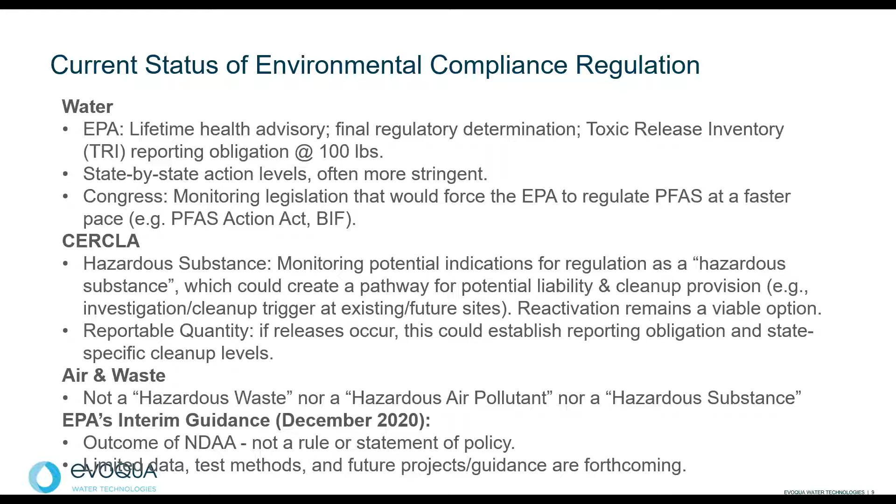And one of the things I wanted to mention is, if you saw the news recently with the Biden administration, on October 18th, the EPA announced its PFAS Strategic Roadmap. It's really the EPA's commitment to action from 2021 to 2024. And it provides the agency a plan for regulating PFAS over the next 3 years.

This roadmap is the product of the EPA's Council on PFAS and includes a comprehensive program combined with expected timetables. I just thought I'd hit a couple highlights for everybody. And if you weren't aware of it and you want to be aware of it, the full report is available at www.epa.gov/PFAS. So quickly, a couple of the actions: establish a national primary drinking water regulation for PFOA and PFOS, and proposed rule is 2022 with a final rule of 2023.

They hope to propose to designate certain PFAS as CERCLA hazardous substances, most likely proposed in spring of 2022, final rule summer of 2023. And the list goes on. So take a look at that website again. It's www.epa.gov/PFAS to find out the latest in the progress that EPA is making on that.

So how does PFAS enter the environment and how do we get exposed to it? Contaminants enter the environment through various sources and eventually make their way into the soils, the groundwater, drinking water, and eventually humans. This picture really tells a story. It all starts with a source. Some examples might be chemical manufacturers or producers, commercial applications, a landfill, your wastewater effluent from a treatment plant, and then even firefighting training areas or firefighting foam application that has been applied.

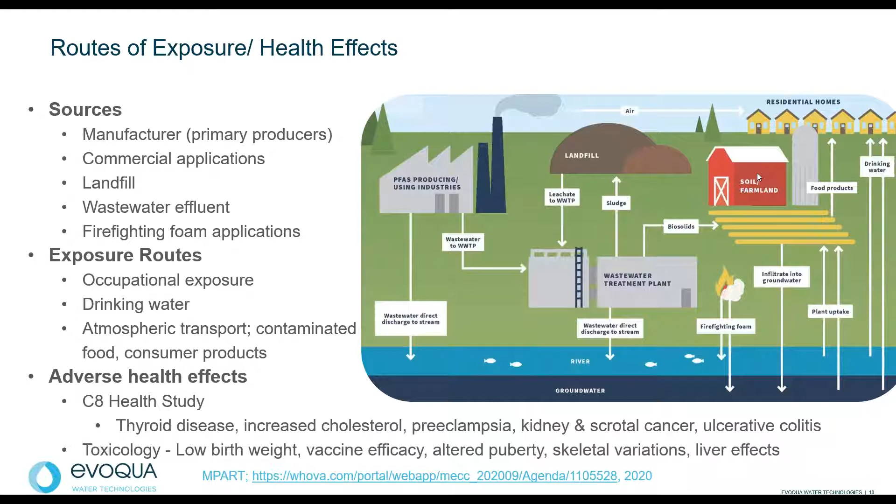And with that, I'll pass it over to John. We'll start getting into solutions and the case studies. Thank you, Jeff. This is John Lombardo. Thank you for your attention today. I'll be covering solutions and case studies.

So, a little click happy, my apologies.

So for PFAS removal solutions, there's really 2 methods that are currently the most prolific in the business: adsorption and separation. So adsorption is an attraction process or an exchange process. And basically we call it a capture technology. It's basically something that captures the PFAS and holds onto it and removes it from the stream. And then separation is exactly what it says. It actually separates it. In this case, it's a membrane.

So the 3 most popular treatment solutions currently in the market, at least for municipal drinking water and some of the others, are granular activated carbon, which has been named the best available technology by EPA for organic contaminant removal. It does have other adsorbent properties for other organics as well. And it's a pretty tried and true technology that's been around for a long time. It requires minimal maintenance and it's very effective.

The next is single pass ion exchange. It has a lower empty bed contact time than granular activated carbon, so it can usually go at a higher flow rate. Therefore, it takes up a smaller footprint because you can get away with smaller vessels. It does not have a chemical or liquid waste from it. The spent resin can be incinerated, and it again has minimal maintenance requirements.

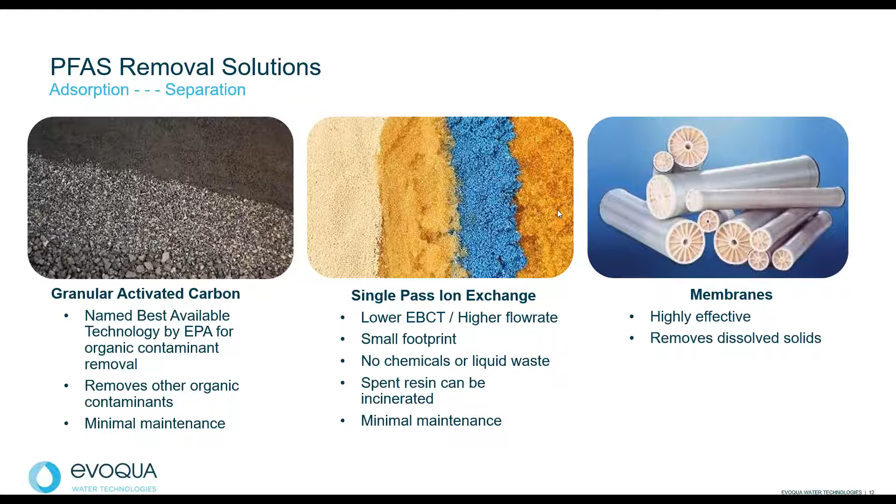The last is membrane, so RO or NF. They're very effective. They remove dissolved solids, but you do have to deal with a concentrated waste stream, somewhere in the range of, I'll say 10 to maybe 25% of the influent stream. But it is effective at separating the PFAS as well as the other contaminants from your influent stream.

So how does granular activated carbon, or why does it work? Granular activated carbon, or GAC, is a highly porous media that has a tremendous surface area that is used for contaminant adsorption. All carbon is not created equal. It all depends on the feedstock. It all depends on how it's activated or if there's any special treatment. The performance really is determined by the porosity and the surface chemistry, which once again is a function of the base material as well as the activation and treatment process.

In Evoqua's case, we do a pretty thorough job of matching the application or the user with the best performing carbon for their specific application. So over on the right, you can see a diagram that shows different pores within the carbon. There are macropores, which are the largest pores. These are basically the largest interstitial spaces inside the carbon. There are mesopores, those are medium pores or mid pores, and then there are micropores, and those are the smallest pores. And the micropores are where the adsorption actually finally takes place.

So if you look in the diagram there, you can see little specks and things going in and migrating their way down to the micropores. So the way that we like to look at it is the micropore is like a parking lot, and the mesopores are the highways that get you there, right? So it's all about balancing highways and parking spaces, right?

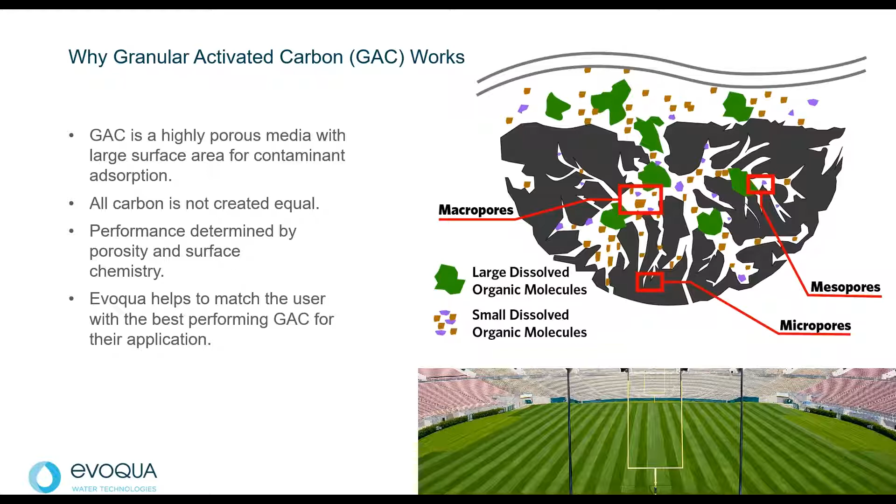So how does ion exchange work, and why does ion exchange work? Well, ion exchange is based on the principle of exchanging a harmless ion for the contaminant. So if you can see in the diagram on the right, the green contaminants are exchanged with the yellow chloride ions, and the green contaminants are stuck on the ion exchange resin and are therefore exchanged for the chloride ions that go back.

So it does take a small footprint because it does have a much smaller empty bed contact time, or a shorter empty bed contact time than granular activated carbon, typically in the range of 2 to 3 minutes versus 10 minutes or so for granular activated carbon. The life cycle costs are a little bit easier to predict because there's less interferences, and the spent resin can be incinerated.

For carbon, just kind of backing up a little bit, where carbon is really an omni-absorbent on organics, it will absorb other things in there. So other organics, naturally occurring NOM, background TOC, other things that are in there. With ion exchange, it does compete with other ions, things like chloride, sulfates, other things that are naturally occurring in the water. So looking at which one is the best fit really depends upon your influent water as well as your effluent guidelines and any other requirements in there.

So it takes a very holistic approach, or it should take a very holistic approach to look at the front end to the back end. Shouldn't be a cookie cutter approach. It really should be a specific approach and a tailored approach, if you will, to solving the PFAS equation.

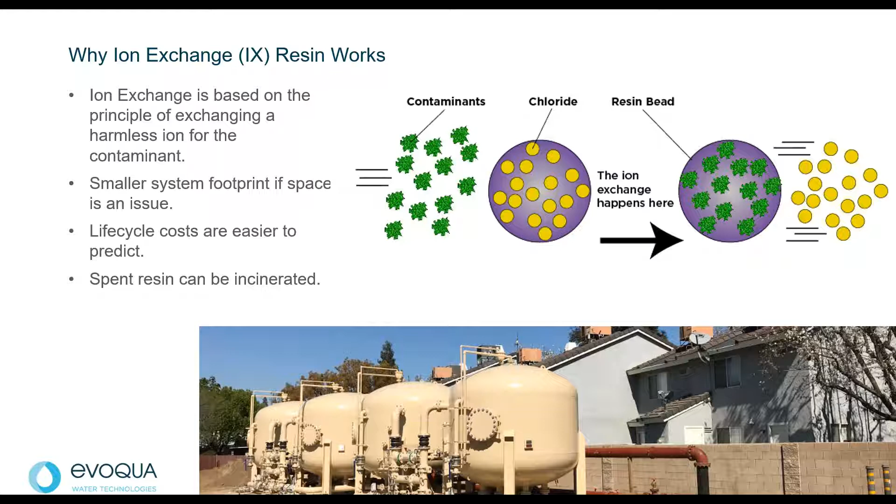The differences really between the two are the pilot scale, or the pilot test, is run on a slipstream of the influent contaminant. It takes a lot longer. Usually it's anywhere from 6, 9 to 12 months to be able to run a full pilot versus an RSSCT, which can be run in a fraction of the time, typically 2 to 4, maybe 6 weeks, depending upon the longevity and the contaminants and all the other things in there.

Pilot testing is usually recommended for surface waters or difficult waters, because it takes into account seasonality and other things. If you have groundwater that's pretty static, if you will, an RSSCT should give you a good picture of what you have, because the RSSCT uses a snapshot, a single grab sample, or even if you've done a composite over some time, it's basically a one-time sample of the water that you're running through on a scale. And that's what we use to then basically scale up or provide information on throughputs, capacities, and performance of the system.

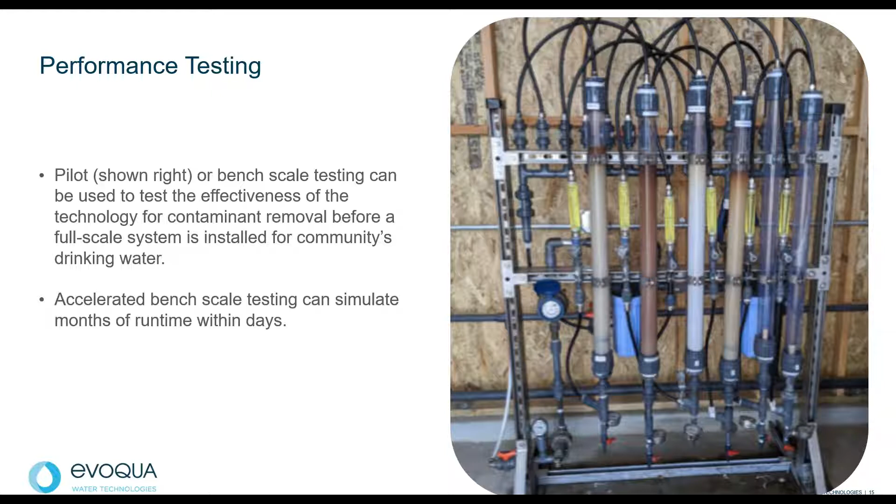So if there's a down, like something happens with your wastewater treatment or heavy rains or something else that needs to be put in, there are opportunities to bring in mobile or temporary systems.

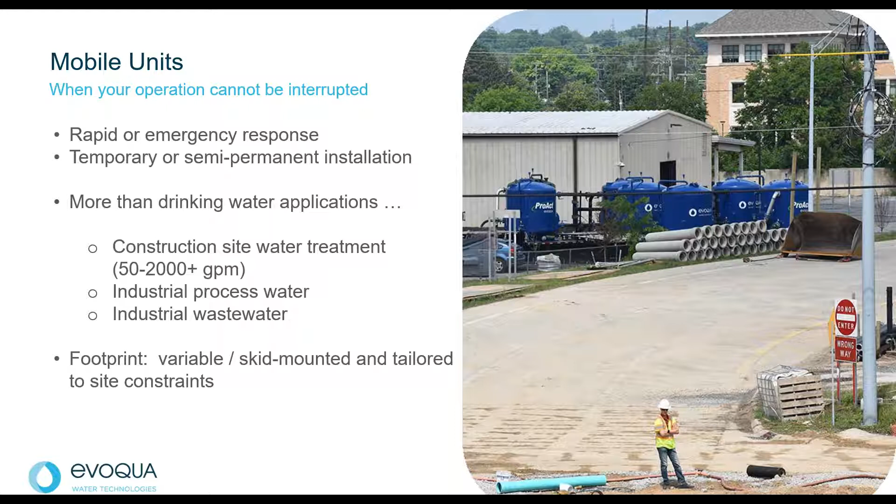So now I'm going to cover a couple of case studies. So the first is water treatment at a construction site for contaminant removal. This also happens to be another site in Michigan where they were doing development in the West Michigan area, and they were under an edict because, as you know, particularly in the north, there's certain times of construction before the ground freezes, so you have to be able to hit certain milestones to make sure you've got footings and diggings and other things done to be able to proceed with construction.

In this case, there was a very high water table that required a lot of treatment, and there wasn't much room, so a tight footprint was needed. There was PFAS at the site, which was higher than had been accepted, so it was not able to be discharged back into the POTW. So we brought in some mobile units and some frac tanks and other things, as you can see in the picture, to store and contain and treat the construction dewatering and make sure that it was PFAS compliant for discharge. The treatment goal was met throughout the project, and the project was completed in, I believe, about 6 to 8 weeks' time.

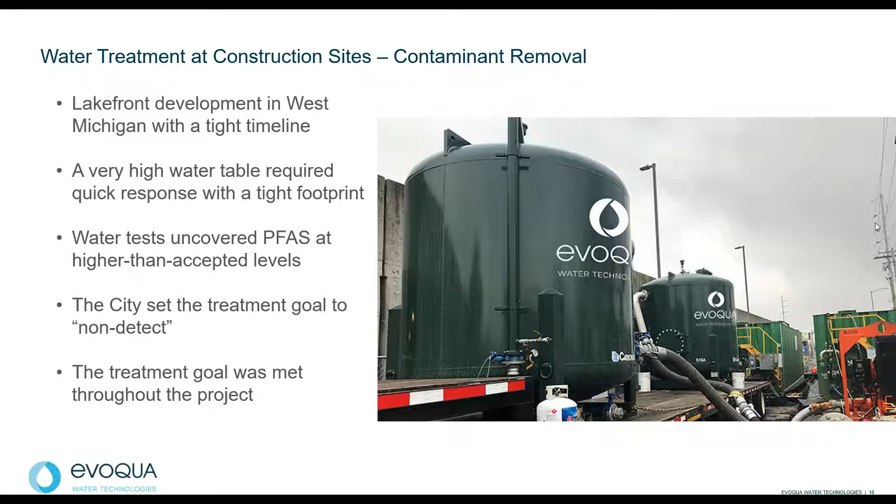So this is another one, another construction site. And this is more of a downtown or an urban setting. The solutions were tapped directly off the wellhead, but they were trying to treat for not just PFAS, but arsenic, mercury, and other contaminants that were in the water that had to be treated prior to discharge. So again, units were brought in both as a combination on trailers and on the ground, and the water was treated and the cleaned effluent was discharged into a municipal sewer.

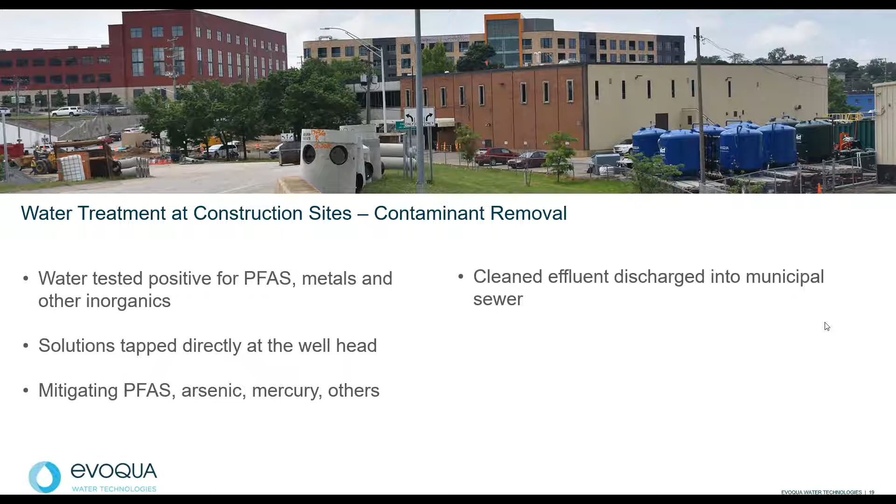Another one, which isn't PFAS, maybe not an emerging contaminant, was an emergency solution installed to mitigate seasonal taste and odor issues at a site in Colorado, where they had MIB and geosmin in the water. The municipality was planning on designing a new facility, but wouldn't be able to get it implemented for a couple of years with permitting and construction. But they needed a solution to treat for the seasonal water when tourists were coming in.

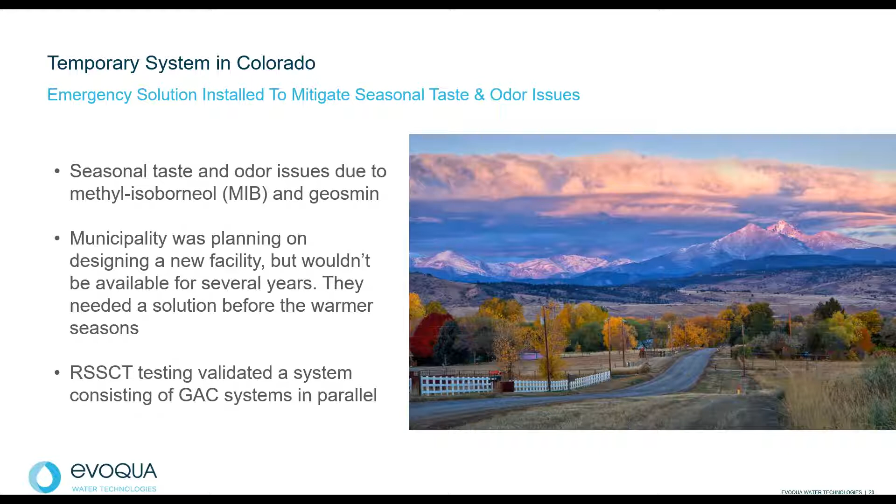So we did some RSSCT testing to validate the offering, and it was a GAC system, operated multiple vessels in parallel, and had a very successful treatment system that lasted for the summer and was taken offline in the fall so that the vessels could be stored and they could put it back online for next summer.

Another case study is at Kennebunk, Kennebunkport and Wells Water District in Maine. This is a very proactive district. They tested many carbon systems and many carbon products. Evoqua was involved in the pilot testing to help support them, and they had decided that they wanted carbon, so we helped them determine which carbon was the best one to perform given their local water chemistry.

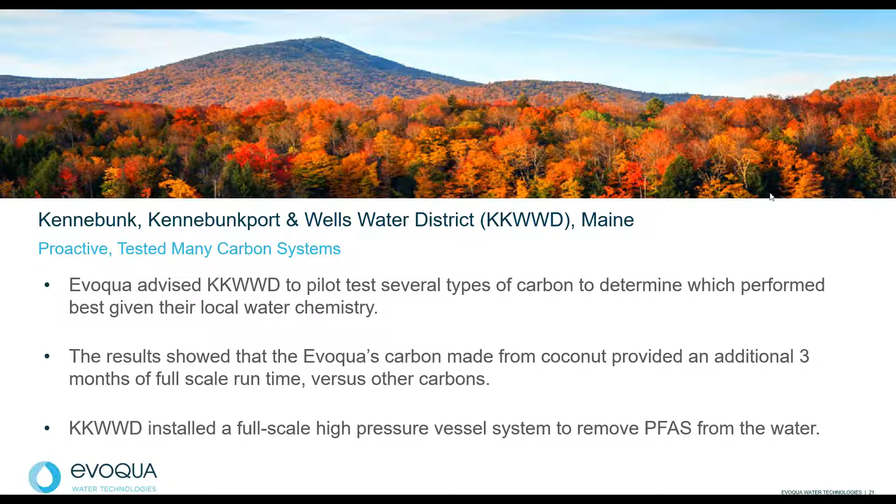In this case, the results showed that carbon made from coconut provided an additional 3 months of full-scale runtime versus other carbons. The following slide will show you a little bit of the data that was used. They installed a full-scale high-pressure system to remove PFAS from water, and it was very successfully implemented and is still online today.

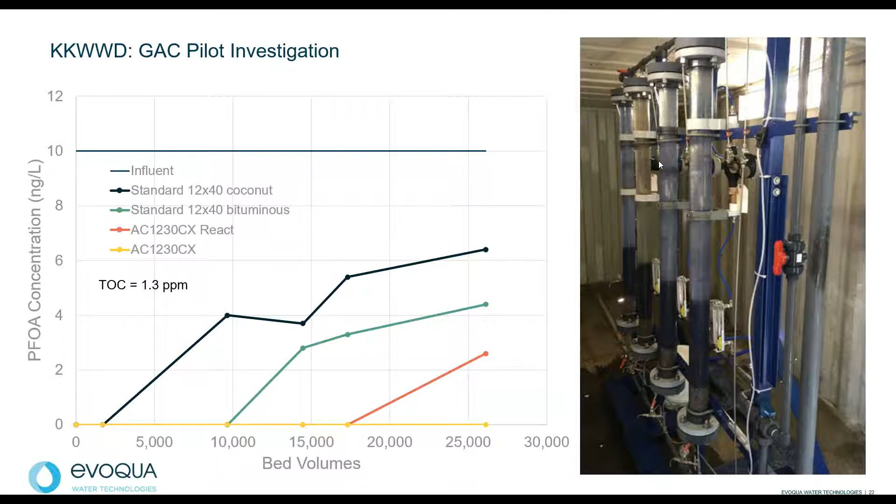It was designed for a 10-minute empty bed contact time, but because of the seasonality of the system, it actually ran a little bit higher than that. So it ran a little lower, about an 8-minute empty bed contact time. It was originally an outdoor installation, which was then moved indoors.

But they also have been doing custom segregated react and return. So they take that carbon back, reactivate it, and then any of the attritional losses are made up with virgin carbon and put back in for reuse. So it's a very sustainable solution as well.

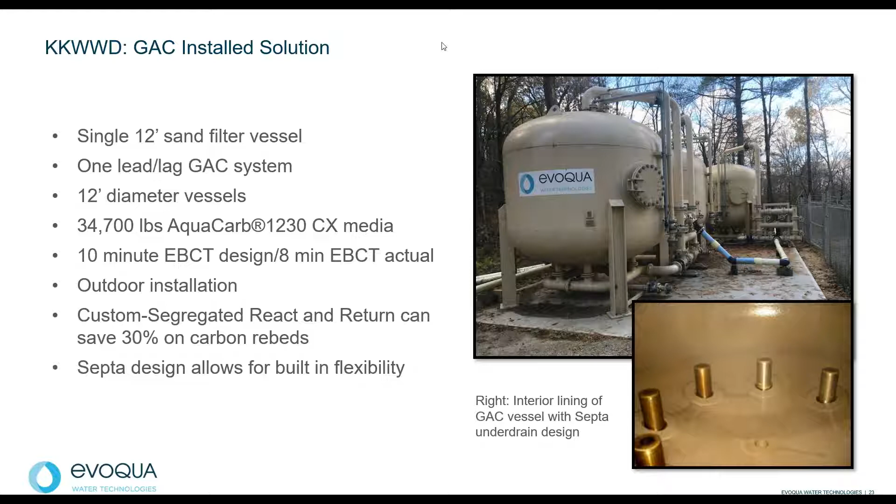It also means if anything happens on the internals, you don't have to enter the vessel to be able to do maintenance. You can drop the ring header and take care of repairs or other things in there without actually having to go inside the vessel.

So basically, one of the great things about this is that it kept the utility independent without having to buy water or use water from another district. And basically, they didn't have any problems. The impact to the ratepayers was small, about 3 to 4 cents a day. And by the time everything gets pushed through, it'll be a couple of years before they actually see the rate increase.

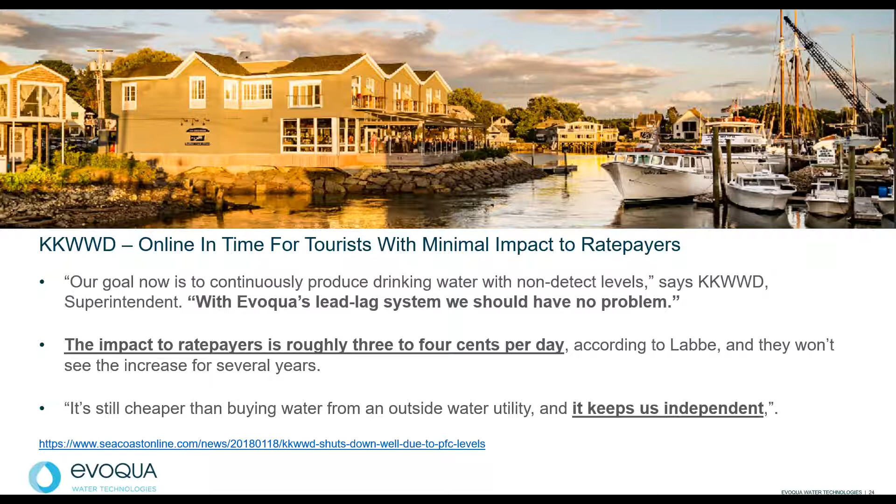Here's another example of a case study. This was down in the Southeast United States. Pilot was also run on the feed water. You can see the pilot system there. The contaminants were PFOA and PFOS. It was a groundwater source that was influenced by firefighting foams. It was really an unknown source of where it came from. The concentrations were above the LHA, the Lifetime Health Advisory from the EPA.

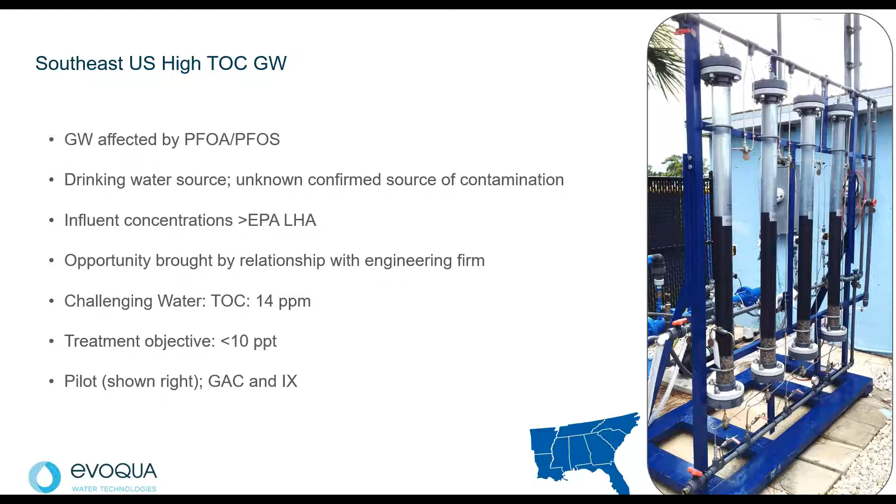The water was very high in TOC, about 14 ppm, which is not unusual for Florida water. However, when we ran carbon initially, it fouled pretty quickly. So we switched it over to ion exchange resin, and the ion exchange resin, even though it turned black almost immediately, continued to perform for great removal for a long period of time. So instead of going with carbon, they ended up going with ion exchange resin. Their goal at the time was to treat to less than 10 ppt for all.

So here are some of the results. You can see that after piloting, they ran at least 60,000 bed volumes before they started to get breakthrough. There might have been a little bit of analytical error. You can see for the components there, for the hexane sulfonic acid and the octane sulfonic acid, they ran out through 150,000 bed volumes without breakthrough.

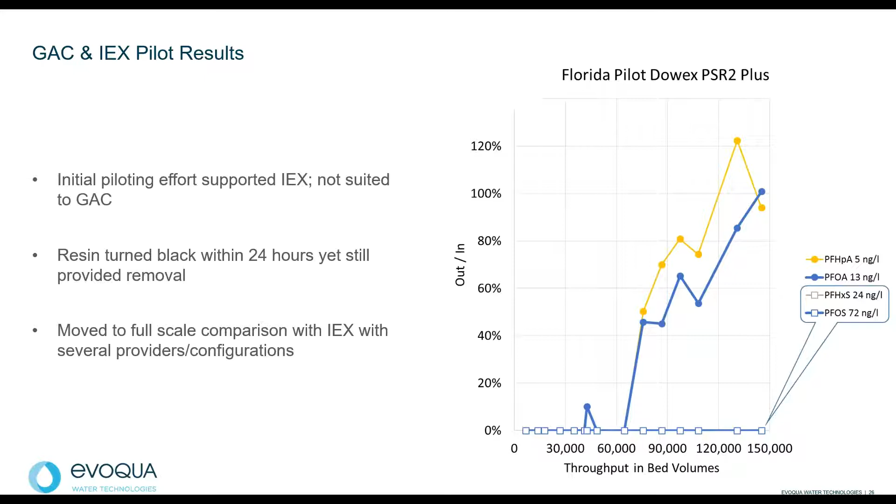And in the full-scale study, so they did a pilot and then they installed a full-scale, you can see that they got well over 100 million gallons of water processed through before they started seeing breakthrough in the vessels. So this was once again using resin as opposed to carbon. In this case, they did a full-scale comparison of resins from 4 different manufacturers.

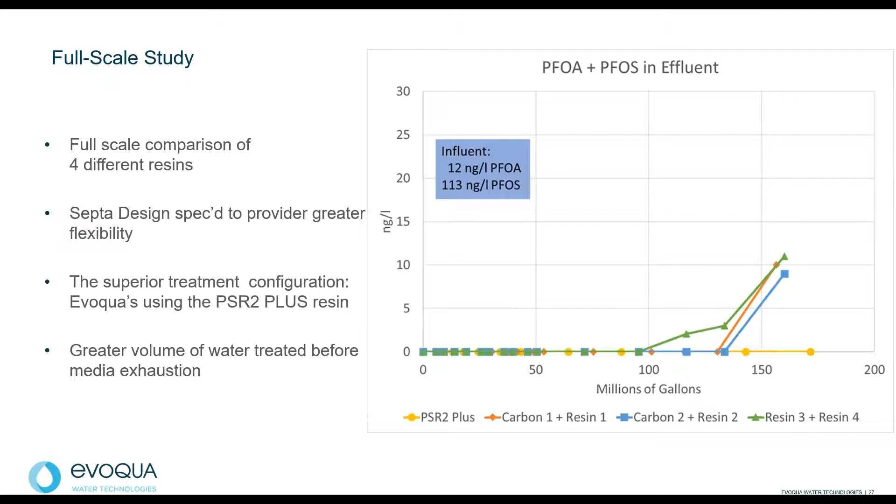The vessels were spec'd with a septa design to provide greater flexibility. Some of the vessels did have a hybrid design, so there was resin as the primary with a carbon cap to help remove organics and maybe a little bit with taste and odor as well. But in this case, Evoqua's PSR2 plus resin turned out to be one of the better performing resins and was then used for rebeds in future versions.

So I think we're now approaching the wrap-up session. So Jeff, I'll turn it back over to you. Thank you.

Thank you, John. That was really great, those case studies.

So to wrap it up, we offer a portfolio of comprehensive solutions from start to finish. We can rapidly deploy mobile assets to your facility, offer treatability studies to help identify the best available technology today. I think we went over those with the pilots or the RSSCTs. Offer permanent on-site solutions. So after the fact that maybe we've done an initial setup, we can install permanent

on-site solutions. Employ a dynamic servicing network to your facilities, able to be on site in most of the US within 2 hours. And our reactivation services, which will help regenerate your carbon. And finally, our knowledge of disposal options to help you see it to the end.

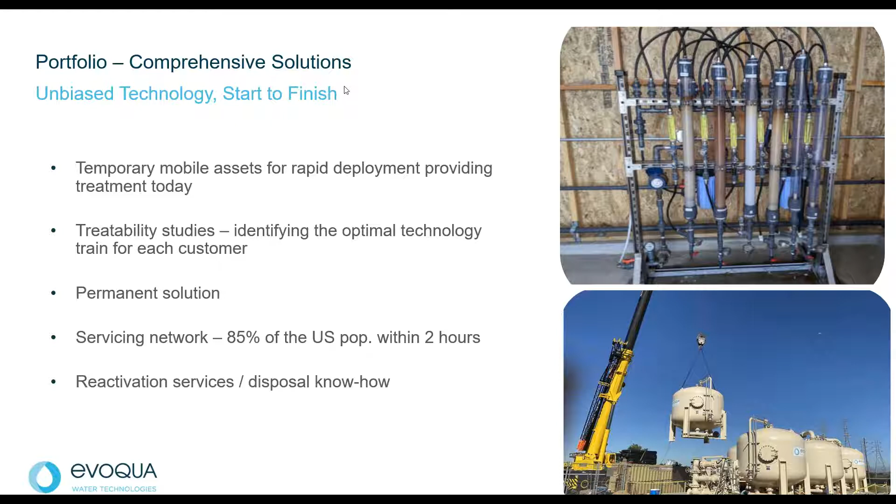So what are the next steps? First thing is to assess risk, determine the regulatory requirements in your state, understand any public concerns and brand protection that you might have with the utility, obtain some background water quality and PFAS analysis. Can't stress that enough. It's hard to set up and design systems without having some great analytical data, traditional water quality, as well as the PFAS analysis done on your water.

Determine if there are any remedial alternatives. Understand the lifecycle costs of the system. Are there any destructive technologies that might be available? These types of new technologies are coming all the time and right now in startup. And what are your disposal options? And finally, decide what type of upfront site-specific testing methodologies, whether it's a pilot or RSSCT, as John went over earlier.

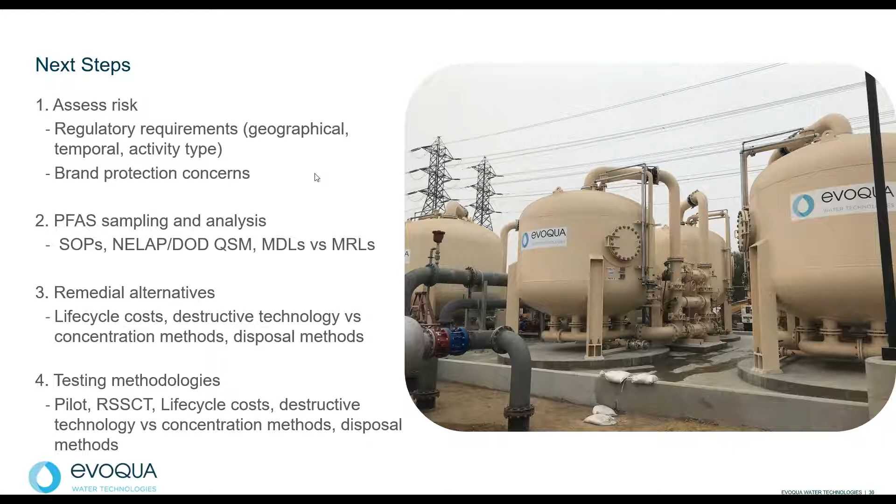And lastly, just to summarize the whole program, your water is unique. Nobody's water is generally the same. So it's always good to provide the most information you can to your treatment technology company.